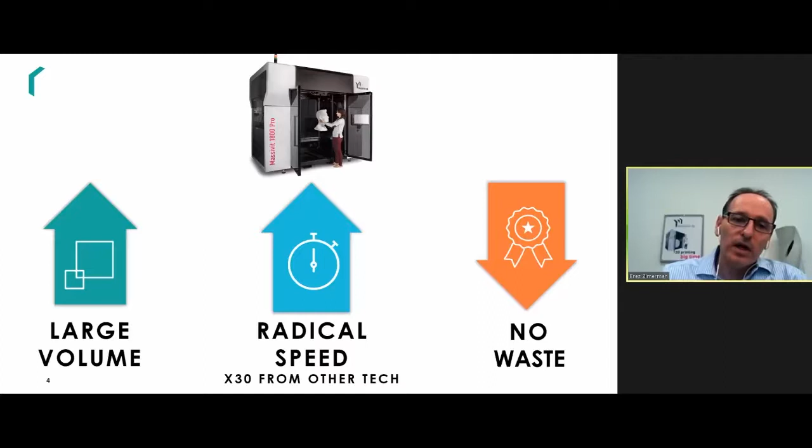Another benefit of our technology is that we print without any support structure, so there's no need to waste material because of the printing process. With Massivit, the object comes out of the printer as is.

Some use cases from our 140 customers around the world who use our machines: this is an example from the events and entertainment industry. You can see the Adidas shoe that was 3D printed with Massivit in a matter of hours, then decorated with color. In the industrial segment, from the automotive industry, a full car was 3D printed in just 2 weeks. This is a 15-foot-long car that was 3D printed.

This is another example from the advertisement industry in Italy, where an eagle was 3D printed for the Imperio billboard. Another example from industrial industries is marine - here you can see a captain's cabinet that was 3D printed and actually used in a yacht.

So this is all about us, and this is the present. Now let's talk a little bit about the future and where Massivit is aiming with our disruptive technologies.

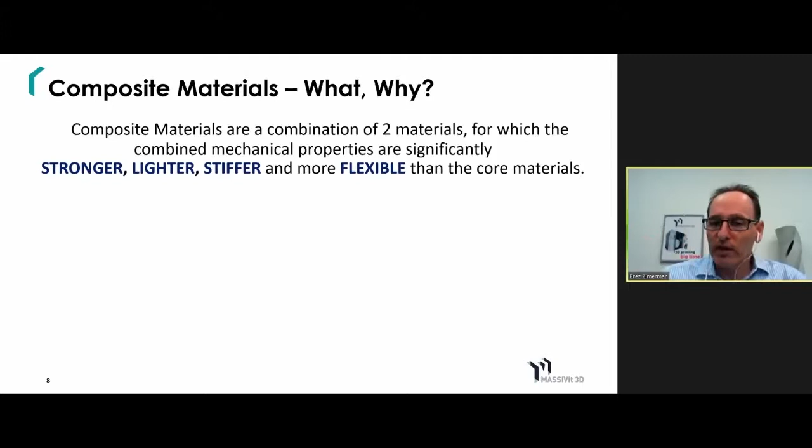Before I get into the details, I want to talk to you a little about the composite material world. I'm sure you've all heard the name composite material - it's actually a combination of two materials, which together make a third material whose mechanical properties are significantly stronger, lighter, stiffer, and more flexible than the two core materials mixed together. A very famous composite material is carbon fiber.

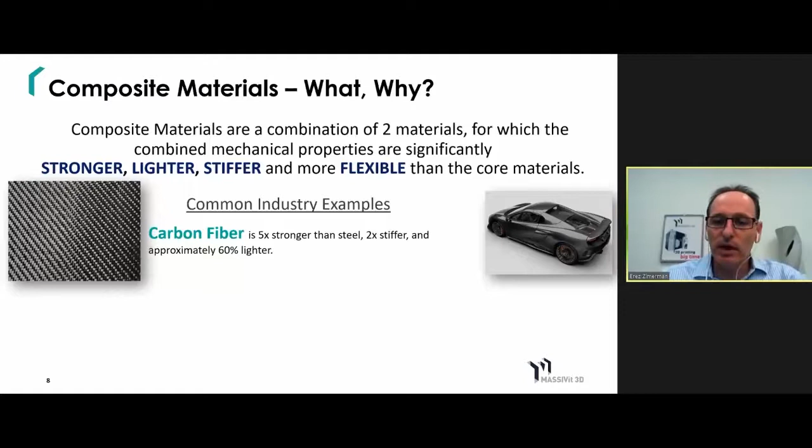Carbon fiber is used in the automotive industry. I'm sure you've all heard about bikes manufactured from carbon - this is a material that's 5 times stronger than steel, stiffer, and much, much lighter than steel. Another famous example of composite material is fiberglass. Here you can see a speedboat. I'm sure you've also seen surfboards.

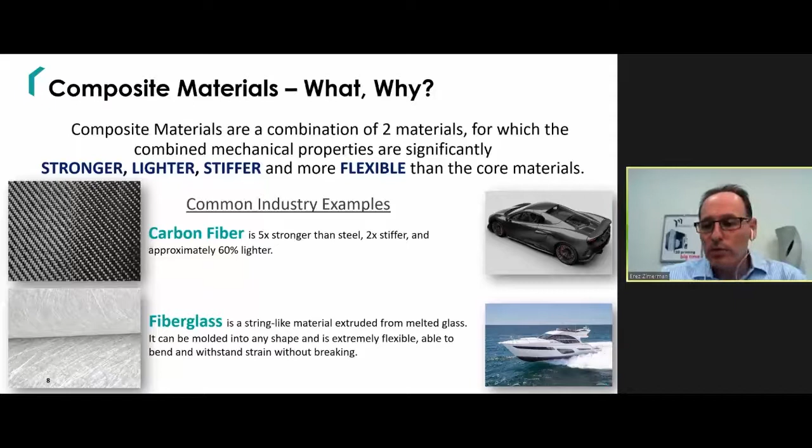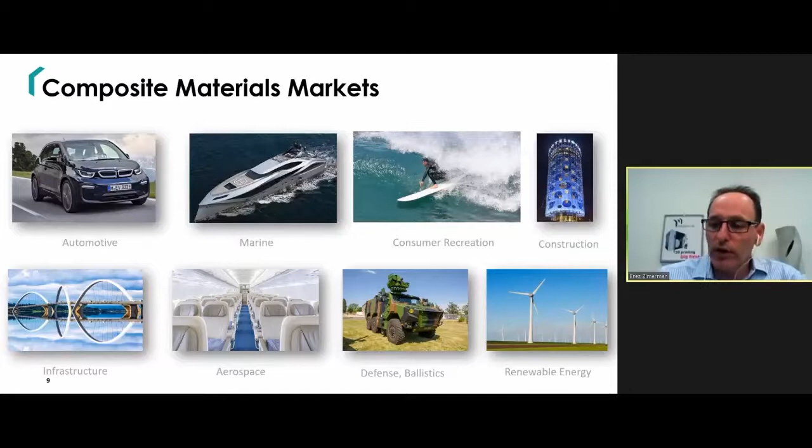This is also a very common composite material that is being used in many industries. When we are using composite material, some of the industries are, for example, automotive, marine, yacht, catamaran, surfboards, consumer recreation, construction, infrastructure, aerospace, defense and ballistics, and renewable energies. I'm sure some of you have seen the huge wind turbines that generate energy from the wind.

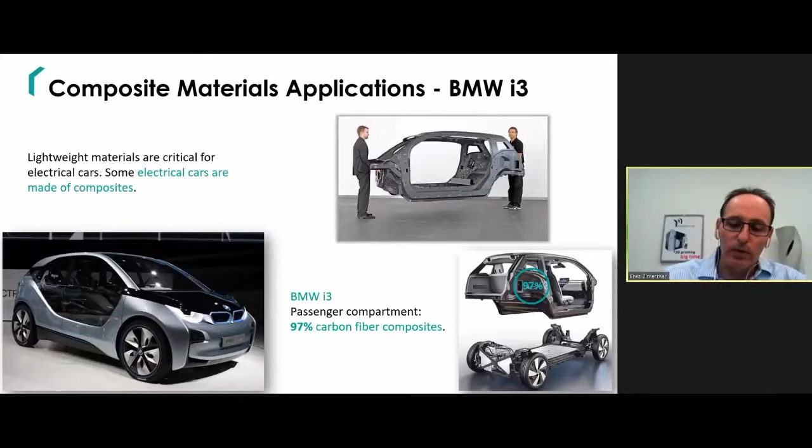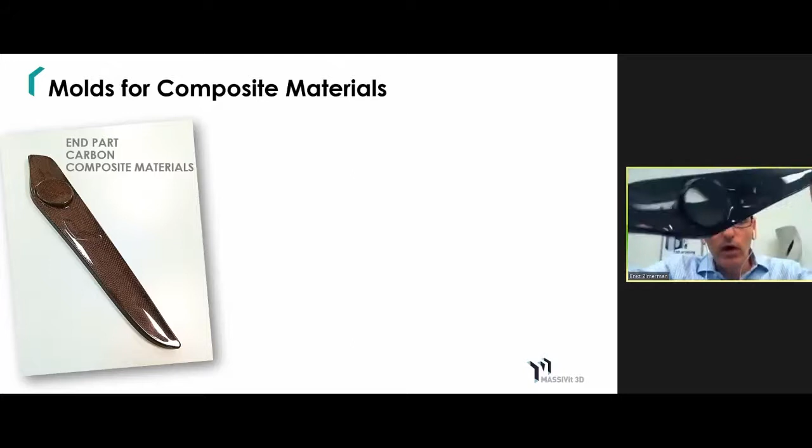So just to give you some background, I hope you can see this part of a car here on my Zoom camera. This is a car part made of carbon material, and this is the carbon fiber as the raw material.

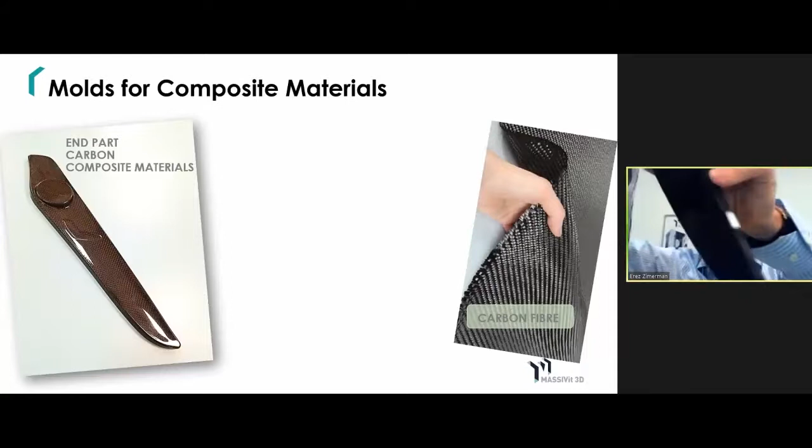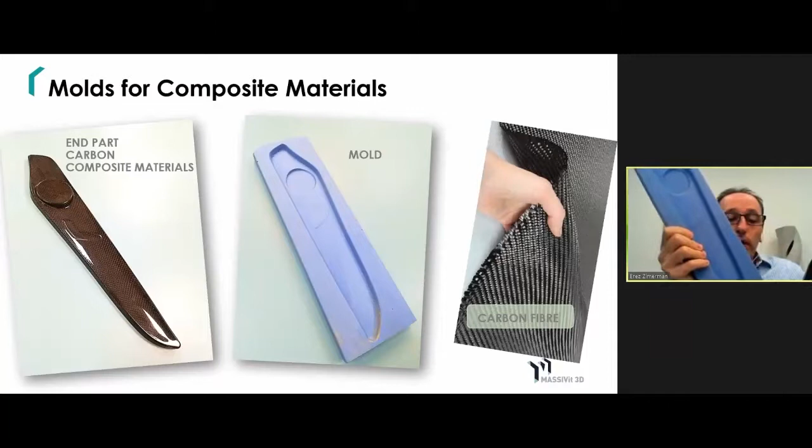Now, to get from carbon fiber to a final part, I will need a mold. This is a mold, and with this mold I'm creating the 3D composite material part. I'll try to make it simple on the technical side: we take the mold, apply the carbon fiber inside it, sponge it with epoxy resin, put vacuum on top of it, and let it lay out for 12 hours. Then we have the final part that I just showed you.

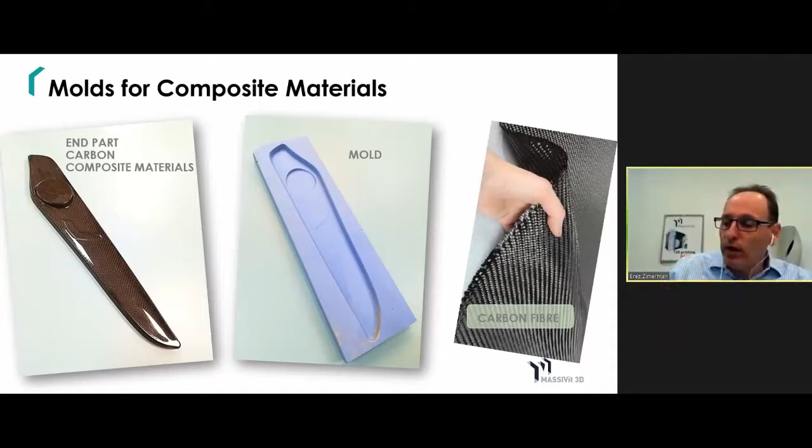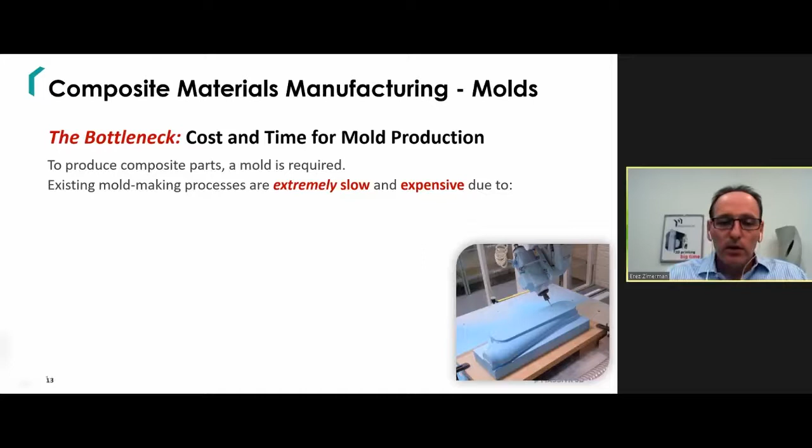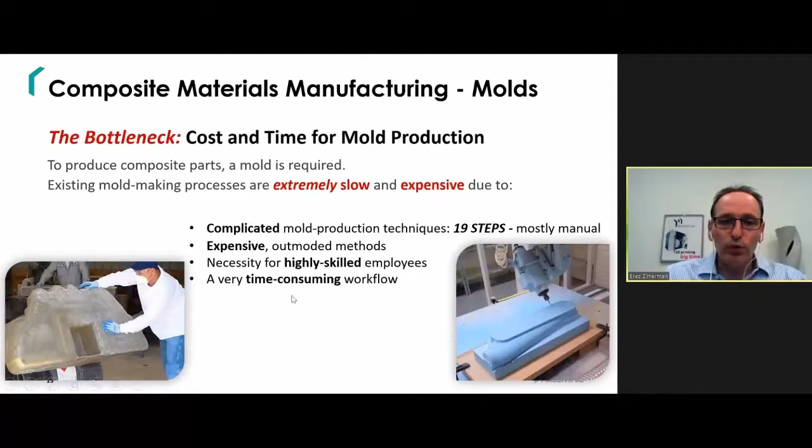This mold is a complex process that manufacturers today produce with traditional techniques, the dominant one being CNC machining. Once you want to produce parts from composite materials, the biggest bottleneck is mold manufacturing. To manufacture the mold is an extremely slow and expensive process for several reasons. First, mold making is a very complicated process that includes 19 steps, most of them manual. It's expensive to produce these molds, you need highly skilled employees or operators, and it takes quite a while - a very time-consuming workflow to produce molds for the composite material market.

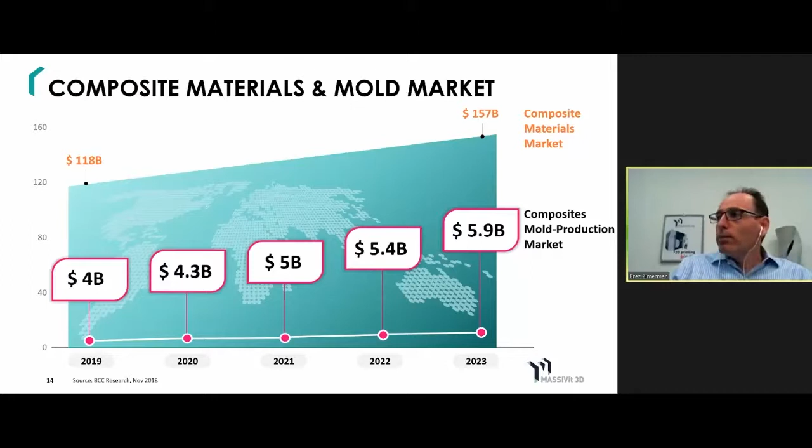Now, the composite materials mold market is huge. In 2020, companies will spend $4.3 billion on producing molds similar to what I have in my hand. Some are bigger, some are smaller, but in order to have parts, they will spend $4.3 billion producing molds. What Massivit is developing is a disruptive technology for the composite material world that's going to change the industry dramatically, and you're going to see our technology in a minute. We're developing a 3D printer capable of printing these molds in a very fast way.

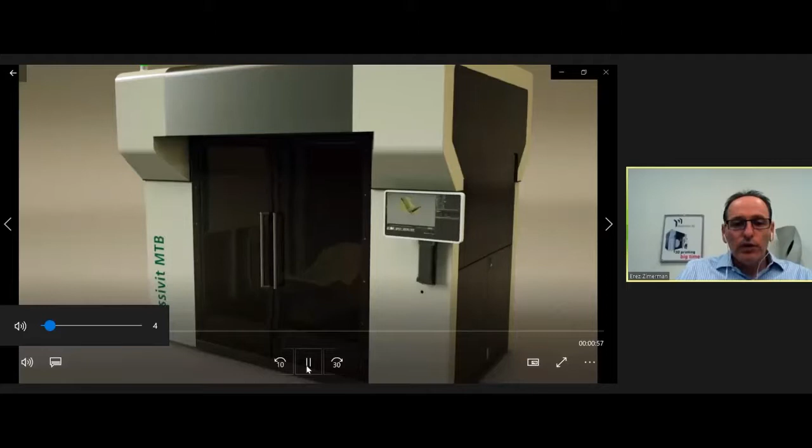I'm going to present our MTB in this movie clip. MTB is an acronym for Massivit Tool Builder. This is a 3D printer that will print molds for composite material. What you can see here is the MTB, and inside is a 3D printed part - it's actually a mold for a car seat made out of carbon.

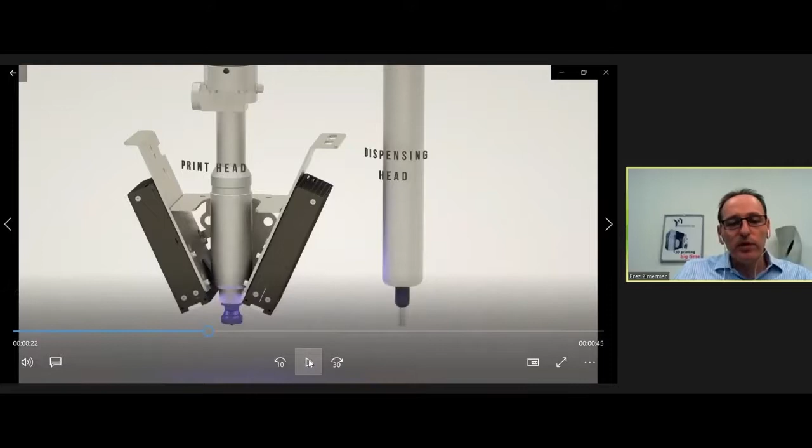Let me show you how our technology works. We are taking two heads developed by Massivit and injecting two walls - we call it a sandwich. We're injecting two walls done by the left-hand print head that you see here, and in between there is a dispensing head that injects castable material. We are printing a sandwich and injecting castable material in between. I understand there's some delay in the movie, so I'll wait another second.

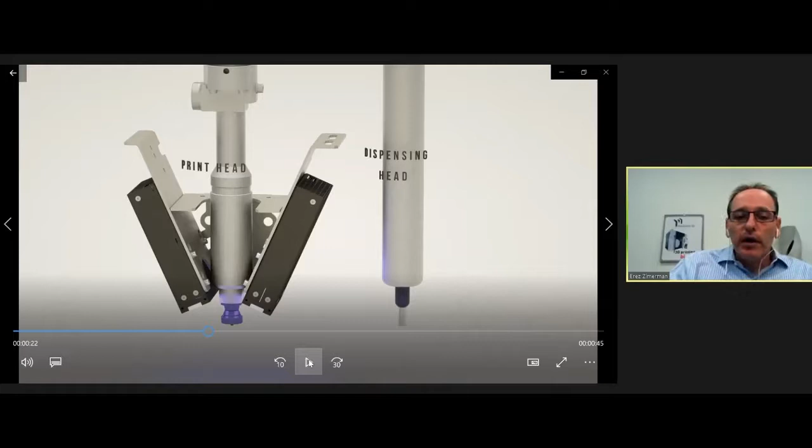So you can see the head, here it is - I have some delay. Again, on the left side, this is the printing engine building the walls of the sandwich. On the right side, you can see the dispensing head that casts material on the fly. Let's see how it works.

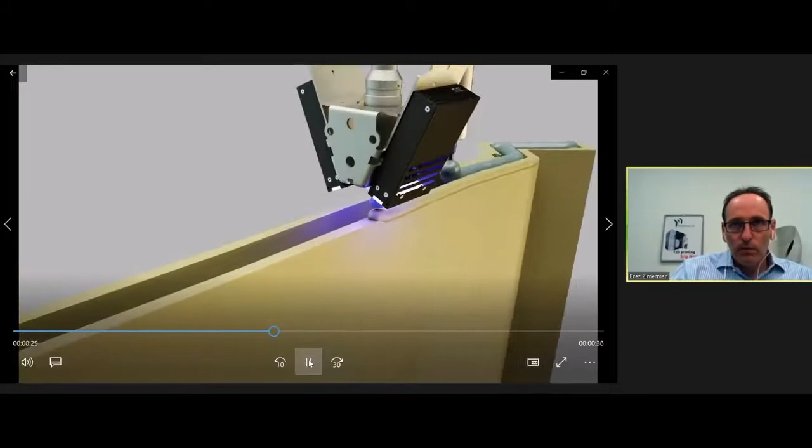I will wait one second so you can see the sandwich, as I call it, and the casting material in between.

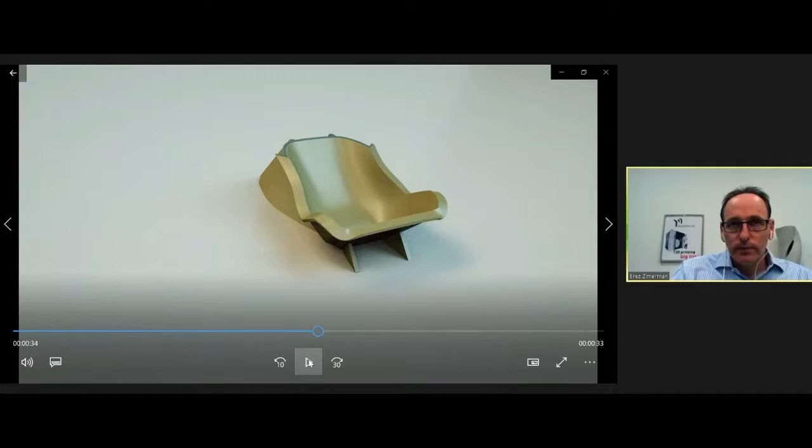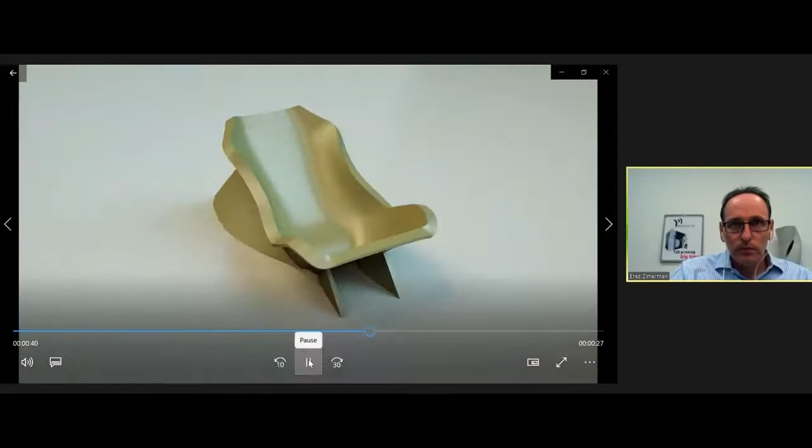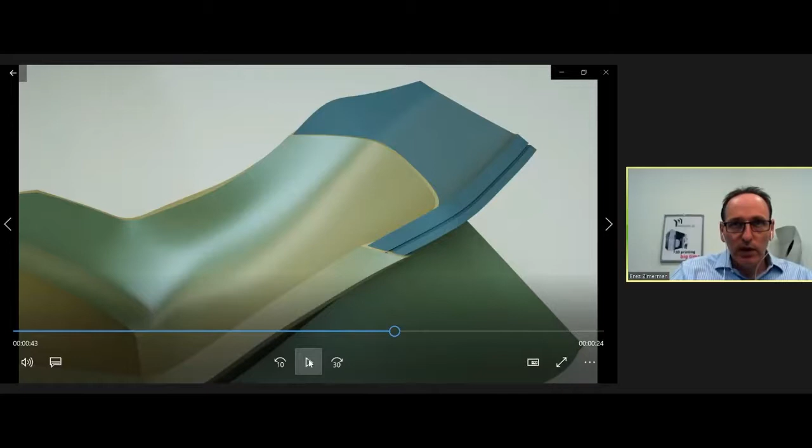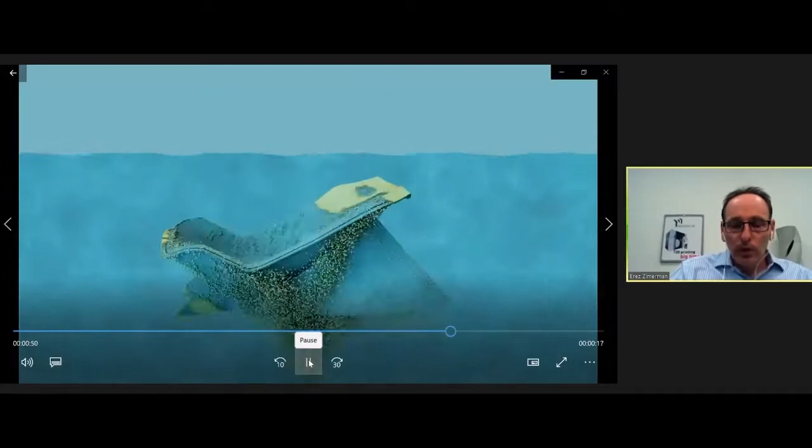This is again the sandwich, and another head, a dispensing head, injecting the casting material on the fly. After the completion of the printing mold, we take the part and put it in simple tap water. We put it in simple tap water, and then the walls collapse.

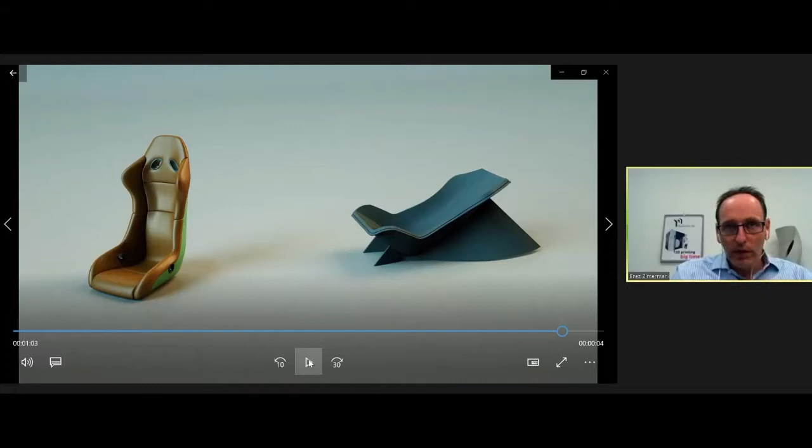I will go back to the presentation.

Now I hope you can see this properly. This is the same mold I just showed you. This is the mold, and this is the 3D printed mold. If you look carefully, the white walls are the water breakable material, and the blue material here is the casting material. After the mold was 3D printed, we dip it into water and the walls fall apart, and then I have the final mold you have over here. This is a disruptive technology we developed, and instead of 19 steps, we're doing it in only 4 steps.

Remember that about 10 minutes ago I threw a piece of 3D printed part into the water just to show you - I cannot do a full demonstration. If you look carefully, the part I dropped inside is falling apart. It does not contaminate the water. This is a totally green solution. We are not contaminating the water, and this can be used very nicely as an environmentally friendly material.

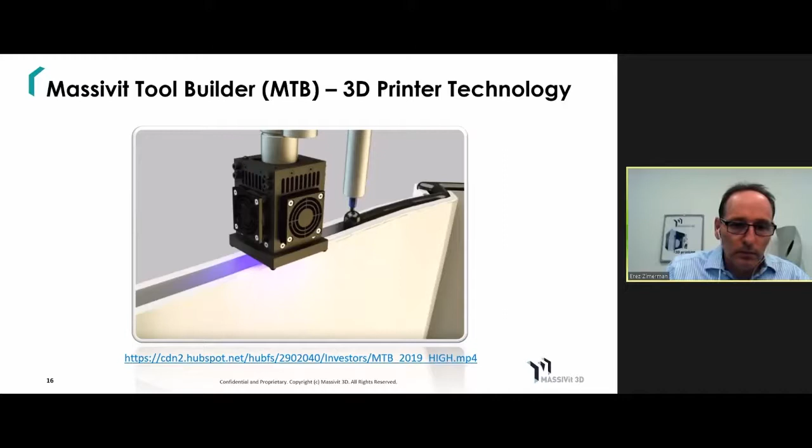After we developed the technology, as you've seen in the movie, we developed the printer, the Massivit Tool Builder. It's an additive manufacturing system that produces large-scale molds in record speed and a fraction of the cost. The MTB is based on our legacy line, called the Massivit 1800, and our main benefit is, as mentioned, we are dramatically changing the process of composite material manufacturing.

Instead of 19 steps, we are doing it in only 4 steps. We dramatically reduce time to market for end-use parts. For example, in a yacht, there are about 100 molds that are today produced by CNC machine, and all this mold manufacturing will be shifted to 3D printing.

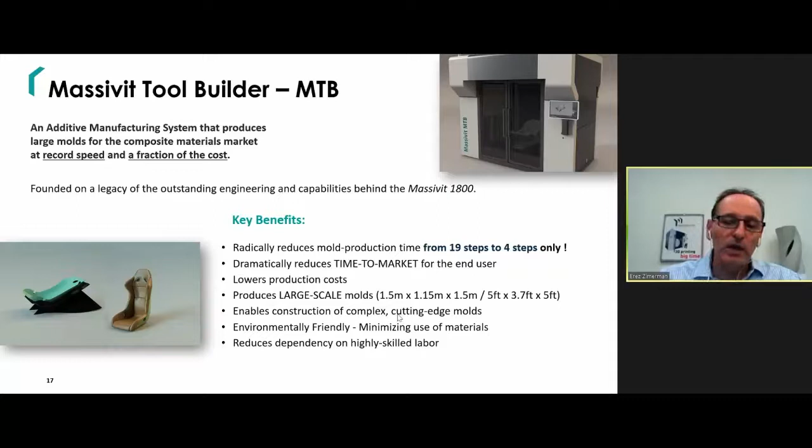We are lowering production costs. We are producing large-scale molds in a size of 5 feet by 3.7 feet by 5 feet tall. We enable construction and the creation of complex and creative geometries. This is environmentally friendly, minimizing use of materials. We are using additive manufacturing versus subtractive manufacturing, and everything is controlled by a mouse click, reducing dependency on high-skill laborers and operators.

This product creates a very unique value proposition in which it cuts 80% in production time, 90% in labor cost, and 50% in overall costs. We see very strong market demand for this product, and we already have contingent purchase orders and continued growing interest and ordering for this product.

We started the pre-sales and we already have 5 contingent purchase orders. 2 customers are from the US, 1 from the UK, 1 from France, and 1 from Taiwan.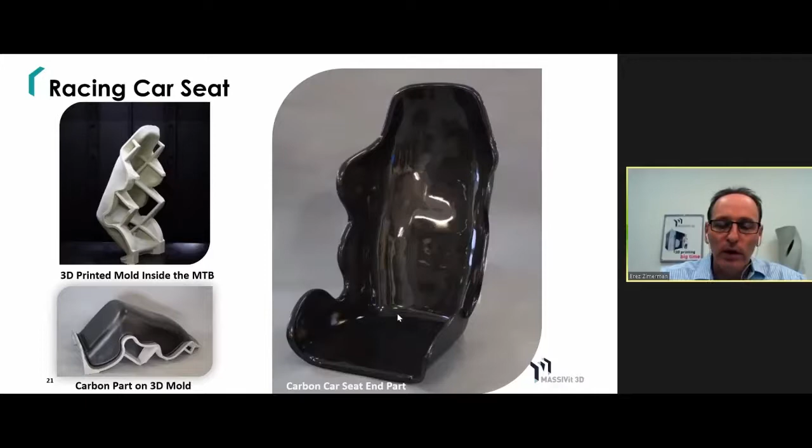Let's see what our customers adopting our technology are already doing with it. Here is an example of a car seat, very similar to what you've seen in the video clip. On the top left side, you can see how it was 3D printed. It was dipped into water, and then they put the carbon fiber on the bottom left side on the mold, and on the right side is the end-use part. This is another interesting example from a catamaran that printed the mold for the hydrofoil, for the fin.

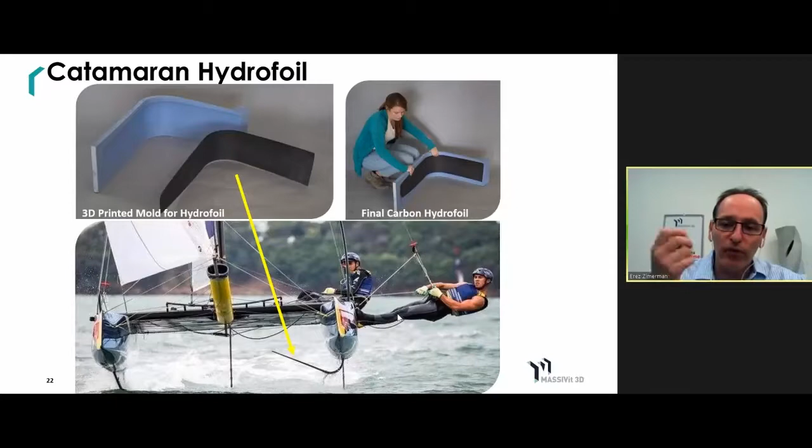We are looking more and more into the future, and our vision is to eventually print end-use parts at large scale - for example, furniture that can be 3D printed, architecture, and of course renewable energy, which is a very important segment in the future as the world shifts to renewable energy.